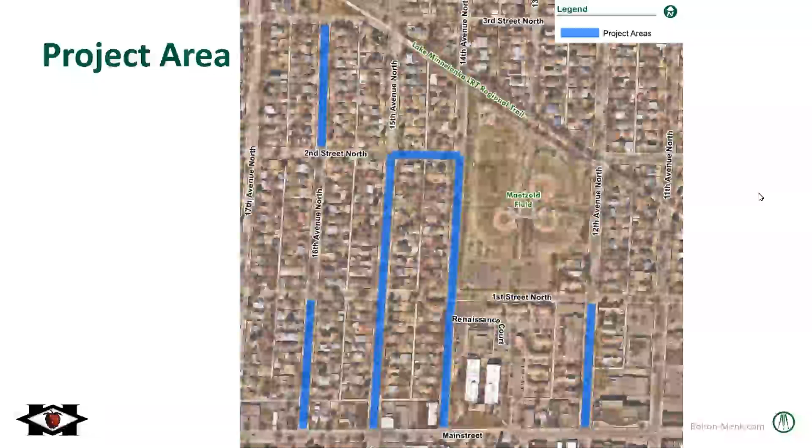So our project development process right now, we're in the feasibility stage towards the end of it. During this stage, we scope out the improvements of the project. We put together preliminary design layouts, identify constraints and general impacts, and put together estimated costs and preliminary assessment amounts.

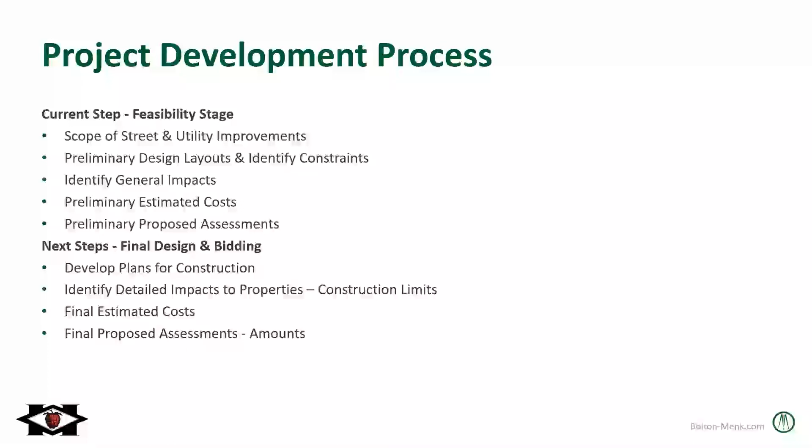Our next step, which would begin after next Tuesday's public hearing, would be final design and bidding. We develop the plans for construction and specifications, identify detailed impacts of properties, and then put together final estimated costs and final assessment amounts.

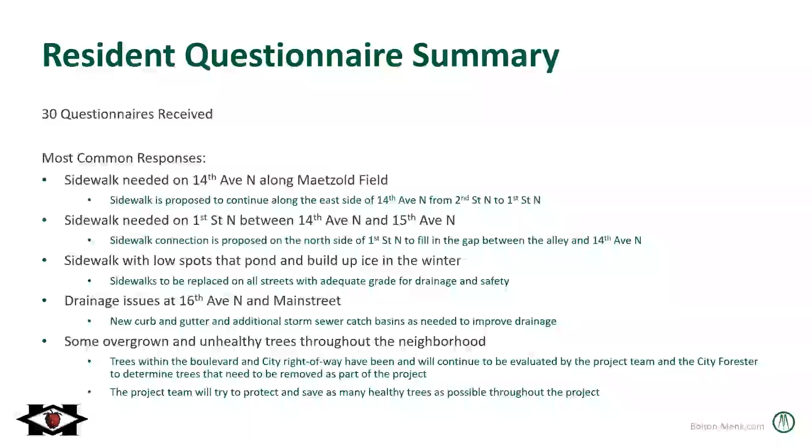So resident questionnaires: earlier this summer, we sent out questionnaires. We got 30 responses back, so thank you for that. Most common responses were sidewalk is needed along 14th Avenue along Maetzold Field on the east side. We are proposing to extend the sidewalk along the east side of 14th Avenue along Maetzold Field.

Also sidewalk was requested along First Street North between 14th and 15th Avenue, and then also between 15th and 16th Avenue at the last meeting. We are proposing to extend the sidewalk there, those two half blocks, fill in those gaps. So that'll be continuous sidewalk from 14th to 16th.

And then the sidewalks have a lot of low spots in the existing walk, which pond and build up water and get icy in the winter. So we are replacing all the sidewalk throughout the neighborhood with appropriate grades for adequate drainage. There's reported drainage issues at 16th Avenue North and Main Street. We will be installing new curb and gutter and additional storm sewer catch basins in this intersection to improve drainage, and at other intersections as well.

And then lastly, there's some overgrown and unhealthy trees throughout the neighborhood. Trees within the boulevard and city right of way have been and will continue to be evaluated by the project team and the city forester to determine what trees need to be removed as part of the project. The project team will also try to protect healthy trees within the neighborhood that can be saved as well.

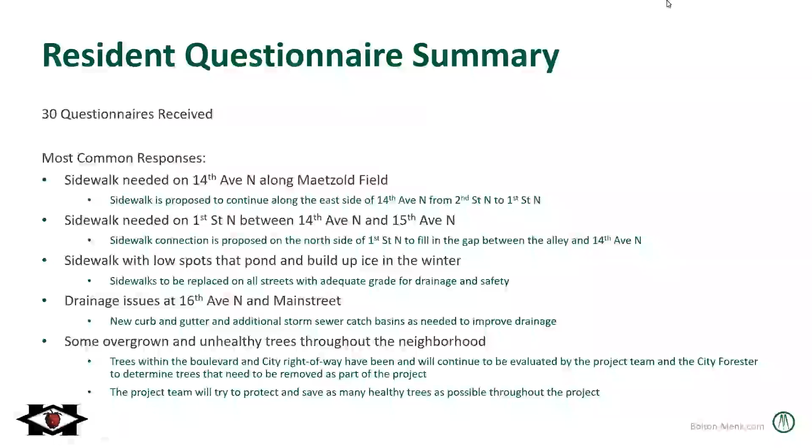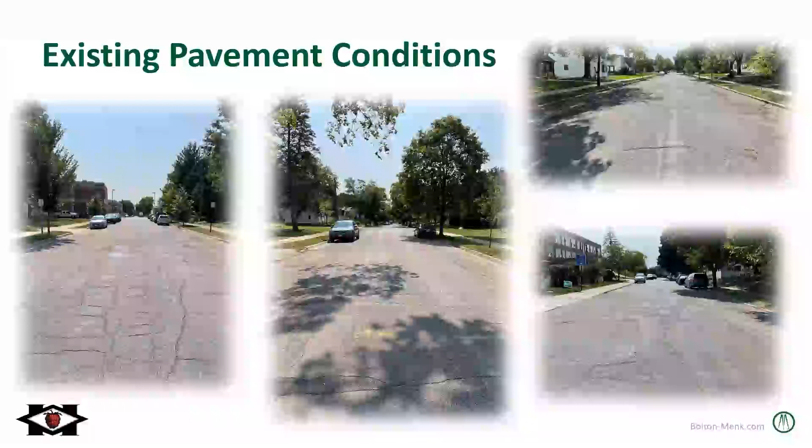Existing pavement conditions, you can see, here's some pictures of the existing streets. A lot of cracking, alligator cracking, transverse cracking, patching, potholes, you name it. Most of you know the street is in very poor condition today. Here's an example of a reconstructed street. This is actually 8th Avenue North, just north of Main Street, that was redone in 2012. The new streets in your neighborhood will look very similar: new pavement, new curb and gutter, new sidewalks.

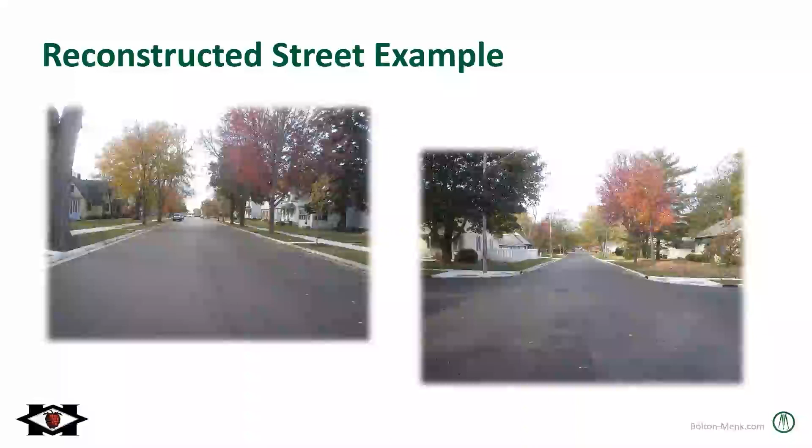So street improvements. Most of the streets are going to be receiving the same improvements: new pavement, new base under the pavement, new curb and gutter, new sidewalks, like I mentioned before, new concrete driveway aprons. Most of the streets are going to be the existing width. For example, 12th Avenue will remain the same width as it is today.

Exception to this, a couple areas, one of them being 15th Avenue north of the alleys near Main Street. It's going to be narrowed by a few feet. Currently, it's 35 feet wide today. That's excessively wide for a residential street. The normal width is 30 to 32 feet wide. So we're proposing to go on that wider side at 32 feet wide, so narrowing about 1.5 feet on each side of the road. This will widen the boulevard to help improve snow storage in the winter, safety for pedestrians, and a better, healthier area for boulevard trees to grow.

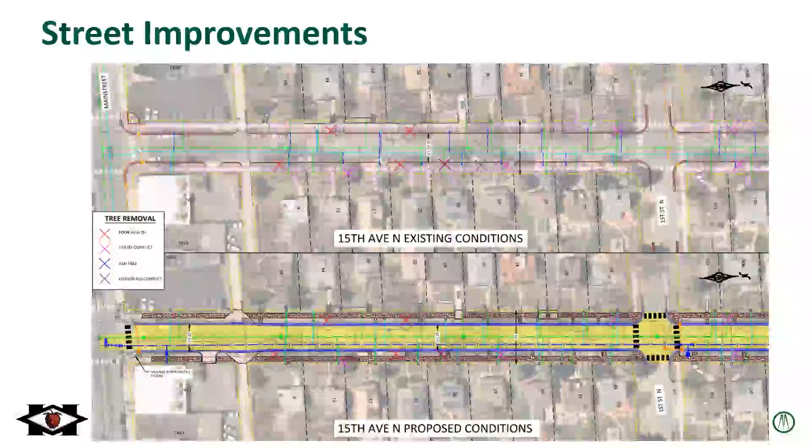Yep, so the question was to review the street widths one more time on 15th Avenue. So north of the alleys, just north of Main Street there, we are going to narrow the road about 1.5 feet on each side, from 35 feet total width to 32 feet total width. That is wider or matches most of the streets in the city and in the neighborhood. For example, 16th Avenue North, just a block over, is only 30 feet wide.

Yep, the sidewalks remain in about the same spot. The boulevard will be a little wider, so the grass area.

So we can get into it a little more. I'll continue with the presentation, we can talk about that a little more. I know that was a little heated topic before too.

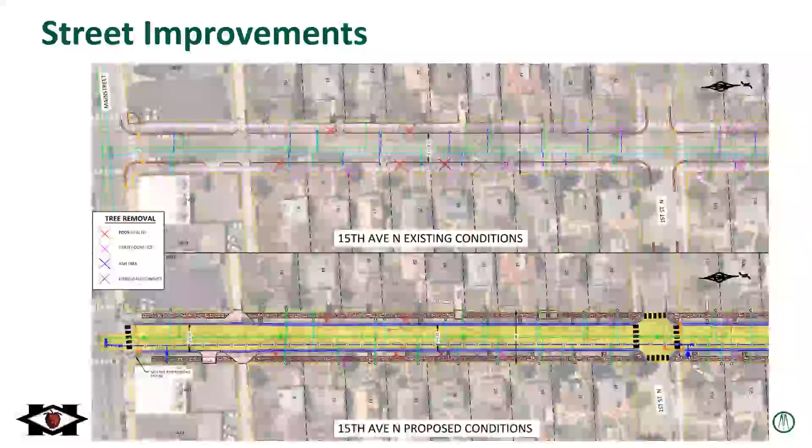So next slide. 16th Avenue North. Again, we'll be doing the same existing street width, so 30 feet wide here. Most of the streets were matching existing grades and elevations. However, this street and a couple other streets, we might have to do this where we're actually going to lower the street a little bit to improve the drainage.

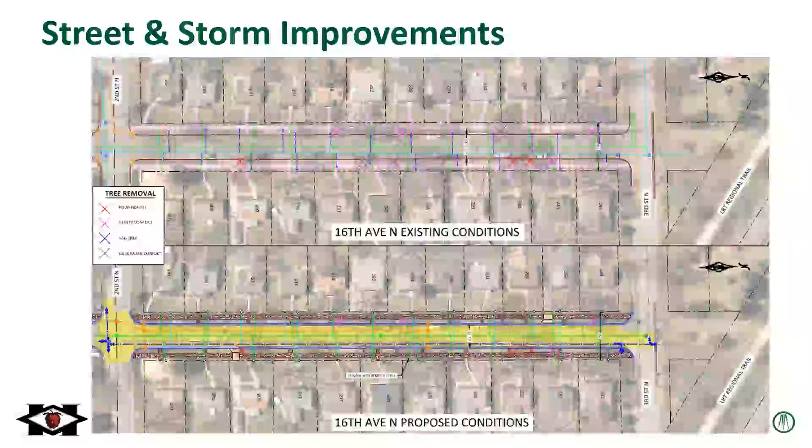From end to end on this block of 16th Avenue North, from 2nd to 3rd, it's extremely flat with nowhere for the water to go. So we're going to lower the road roughly mid-block and extend and add storm sewer catch basins to have a place for the water to drain.

Some pedestrian improvements that I mentioned before, 14th Avenue North, we're going to extend the sidewalk that currently stops at 2nd Street North all the way down to 1st Street North on the east side along Maetzold Field. We do have to narrow the road here slightly just to fit in that sidewalk from 35.5 feet to 34 feet, so 1.5 feet total narrowing. We want to keep that street wider because we know all the parking along Maetzold Field during events.

The other pedestrian improvements, besides replacing all the sidewalks in the neighborhood, we're also adding sidewalk on 1st Street North between 14th and 15th on the north side to fill in that gap between the alley and 14th. And then on the other side, between 16th and the alley between 15th and 16th to fill in that gap. So now there should be continuous sidewalk, at least on one side of the road along 1st Street from 16th all the way down to 5th.

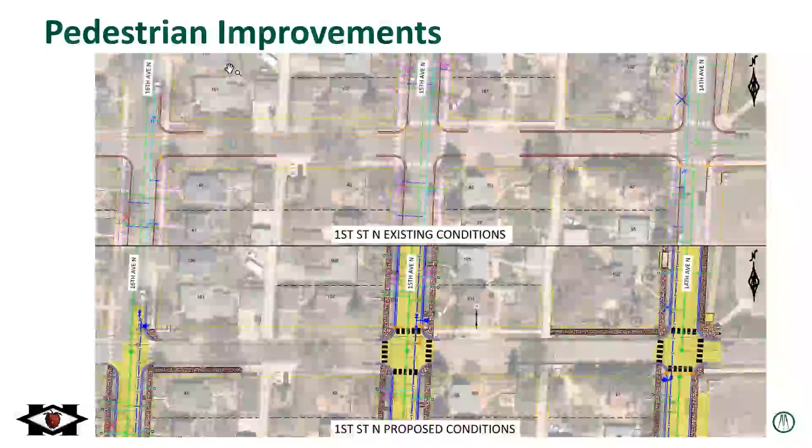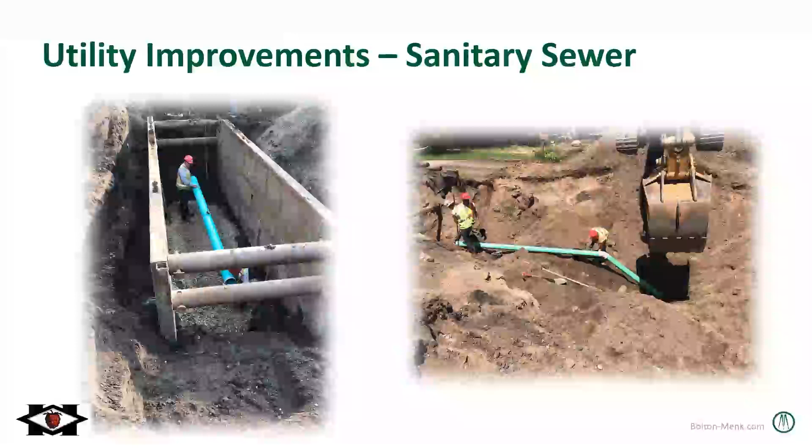So moving on to utility improvements. First utility to get replaced is sanitary sewer. We're going to be replacing all the old clay sewer pipe throughout the neighborhood with new plastic PVC pipe, and also replacing all the sanitary manholes as well. Water main, we're going to be replacing all of the old 6-inch cast iron pipe, which is a brittle pipe, with new 8-inch ductile iron pipe, a more durable pipe that we're also upsizing from 6 to 8 inch to increase capacity and fire flows. We'll also be replacing all the water valves and hydrants.

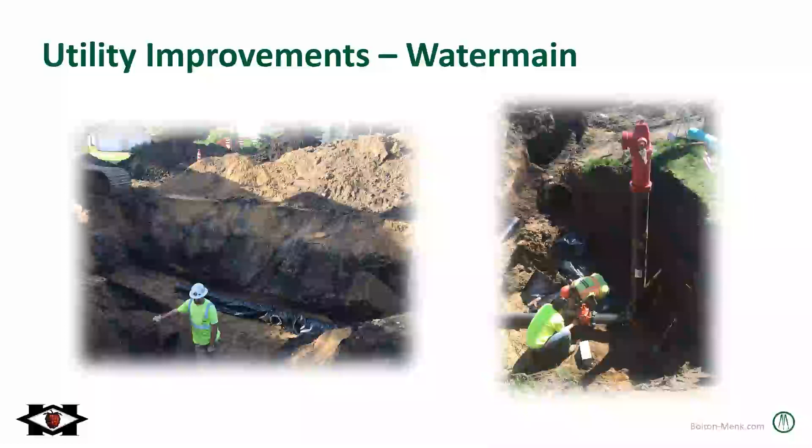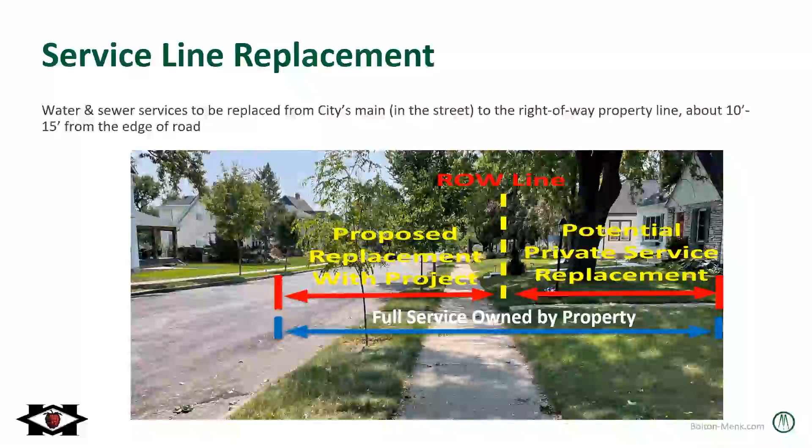Along with the main replacements, we'll be replacing individual water and sewer services from the main in the street, both sanitary and water, to the property line or the right-of-way line at each property. That right-of-way line is typically right behind the public sidewalk. And then from the right-of-way to the house, individuals have the opportunity, if they want, to replace the rest of their service using a private plumber. It might be a good time to do that with the road being opened up and yard being disturbed, but that would be an expense on the homeowner.

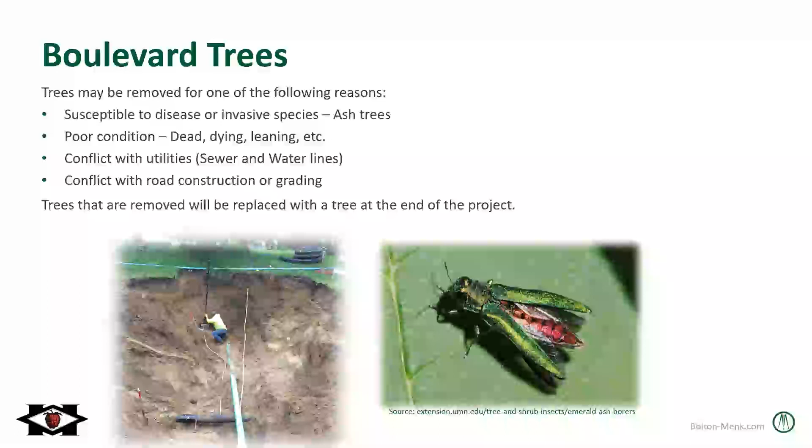Boulevard trees. Trees may be removed for one of 4 reasons. So first being that they're an ash tree. Most of these trees in the neighborhood have already been removed. You might know some stumps are still around; we'll grind those out during the project. Trees might be in poor condition, so they're dead or dying, leaning, overgrowing. Conflict with utilities. These are mainly conflict with the sewer and water service lines I was just talking about. Sometimes these water and sewer services go directly under a tree. It's just unavoidable. We got to take that tree down. Conflict with road construction or grading. This would mainly be if a boulevard tree is overgrowing the curb line or heaving up the sidewalk. It's just getting too big for the space that it's in.

And all trees that we remove will get replaced at a 1:1 ratio, and we'll reach out to individuals who are getting a tree removed, and you'll have a choice. I believe it's one of 10 options of species. We try to give everyone their first choice, but we also try to diversify the species. So not everyone can pick a sugar maple, but usually we can give people their first or second choice of tree.

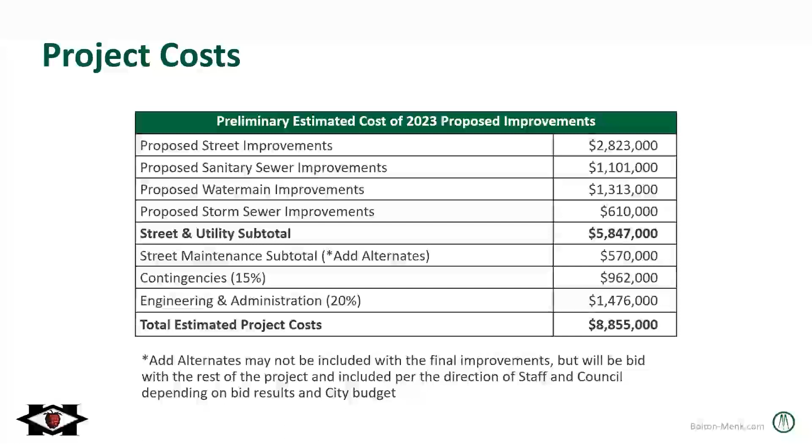Project costs. So this project for the street and utility improvements on 12th, 14th, 15th, and 16th and 2nd come to about $5.8 million. There is a street maintenance part of this project too that we're not going to talk about. It's actually going to be right outside of City Hall here, where we're just going to be doing mill and overlay and reclaim, some more street surfacing, maintenance activities. That's a little over $500,000. Then building in 15% of contingencies and 20% of engineering costs, we're looking at about $8.8 million for total project costs. So the project will be funded through five funding sources.

The main one being the general taxes and bonds. About 40% of the project will be funded through that. The other will be special assessments, which we'll talk about here in a little bit. That'll be a little over $1 million. And then the water, sanitary sewer, and storm sewer funds about half of the project.

So special assessments. Assessments are proposed for all reconstructed streets. Most of you or all of you should have received individual letters with estimated assessment amounts that were mailed a couple of weeks ago. They're made up of a couple of parts. The first being the street assessment is 70% of the total street improvement costs. And this will vary for each property based on the front footage. So a 60-foot lot would get assessed more than a 40-foot lot. The front foot rate is subject to a cap, however. We'll get into that on the next slide.

Streets with no adjacent property addresses, so 2nd Street North, will be distributed 1 block north and south for those assessments. However, this may not apply if property is already assessed on a current or recent improvement project, which I'll talk about a little bit too here. Utility mains, so the storm sewer, water main, and sanitary sewer main. There are no assessments for that. That's all from the city funds.